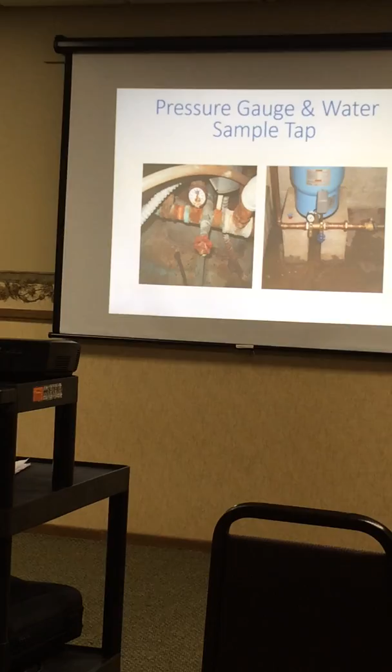If we find total coliform, we're doing an investigation. If we can't sample your well, now I know I'm not asking for a tap on the well, but usually there's a drain at the pressure tank. But in some rare instances, folks, you have no means of sampling the well. You have to sample at cabin 7 after it goes through all this plumbing. So you can't tell if the bacteria is in the well, that's the problem.

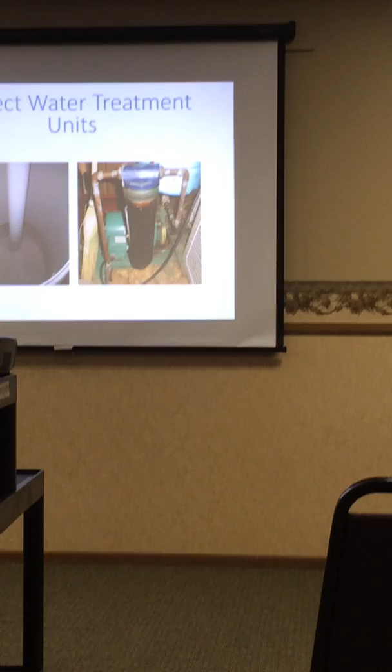So we should have a sample tap for each of your wells, and also, again, a pressure gauge that's functioning for each of your separate plumbing systems. And folks are being very good at not asking me questions, so jump right in there if you have one. I have a question back on that one.

So if you've got it down in the ground, you've got to pump it someplace to get to a spigot. I mean, you don't usually have a spigot right where it goes in the ground. That's correct, yeah. So you're still going to have to pump it through some underground pipe. Oh, yeah, yes. But proximity means everything.

Let's just say, for example, I've investigated many, not because I'm smart, not because I'm good, it's just because I've been around so damn long. I've investigated many TC contamination events through my career. And sometimes they're associated with water softeners.

So if you're investigating a total, I'm working with you, you want this to get over as soon as possible. You don't want to be dealing with this. You don't want me around. You just want to get on with business. I'm trying to help you. I am. Well, so I'm sampling.

If I've got to go to cabin 7 and it's all softened water, I can't tell you whether the softener's a problem or the well's a problem. I can just say something's a problem. If I can get a sample out of the well before the softener, nothing is for sure, but I can suggest that the problem's in the well, and maybe the softener too. Okay, good. Thank you for the question.

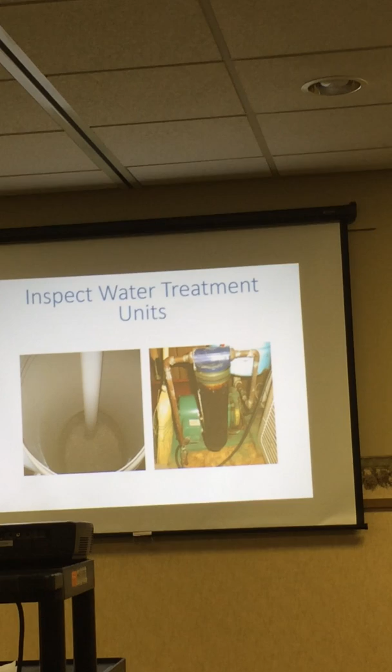So anyway, you have water treatment systems, and I would just say, in this case, that's a filthy brine tank in a water softener. You're asking for a bacteria problem if you allow that to happen. And really, you should be inspecting your water softener brine tank in the spring to make sure there's no dead mice in it and stuff. But I would suggest that it get cleaned out in the fall. That's the logical time to tidy it up.

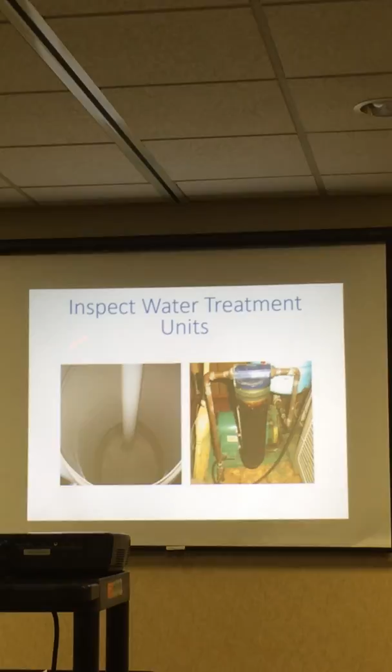Low on salt, scrub it out, add a little bleach water, clean it out, have it nice and clean to start the spring. That'd be my suggestion. But we're not requiring a shutdown procedure. The rule requires a startup procedure. Hence, don't start off the season with a filthy water softener is my point. And then cartridge filters, yeah, they're fine. They do something.

They only do something if they're maintained, and if they're not maintained, they typically make your water worse. And we've had bacteria problems associated with improperly maintained cartridge filters. So, did you have a question, sir?

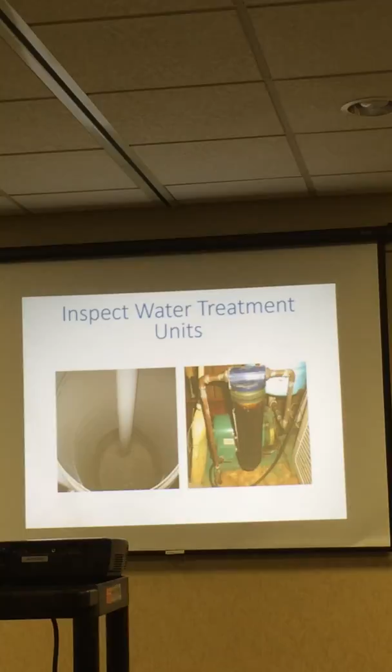Okay. And so, inspect the treatment system, one of your favorites, I'm sure. The government's always gonna bug you about this, and it's one of those defects that Chris talked about. So it's one of those things that we find now, and we say, you gotta fix this, and if you don't fix it, ultimately it's gonna put you on increased monitoring. You'll lose the ability to be on quarterly or annual monitoring.

So if you've been fighting, I am not gonna put an air gap on my water softener. Well, I'm sorry to say the government's got a bigger hammer now. So make sure that with your discharge lines from your water softeners, or if you have a backwashing media filter or carbon filter, anything that discharges to a waste stream, a treatment component, make sure it shoots through the air.

And what happens is, some years, this stays good, and then if you were my client, Chris was talking about the annual site visit, you know, we do our inspections every 3 years, but now we have to do this little mini inspection to keep the EPA happy, to keep you on annual monitoring. We look for sanitary defects. If I knew you had this, I wouldn't say, Eldon, I need to go look at your water softener and make sure you got an air gap there, because it was there last year, and it's not gonna change.

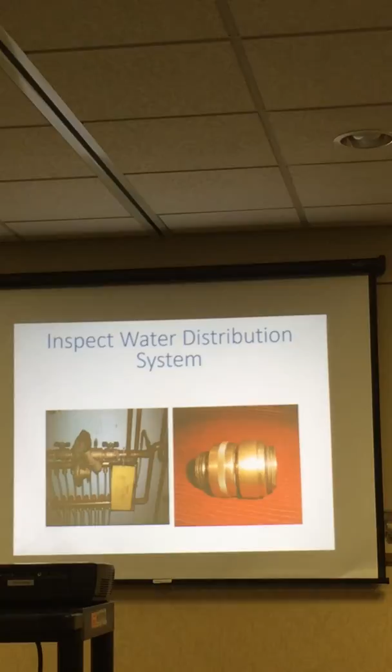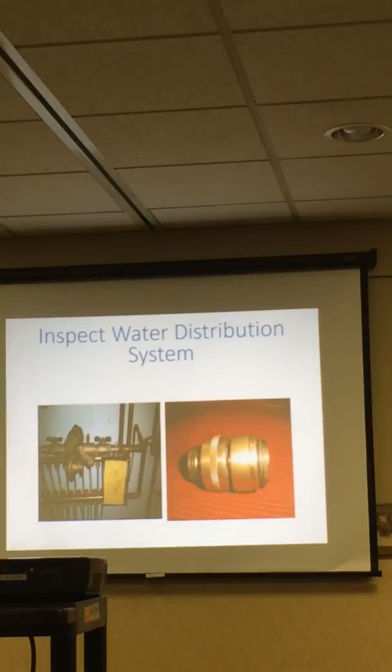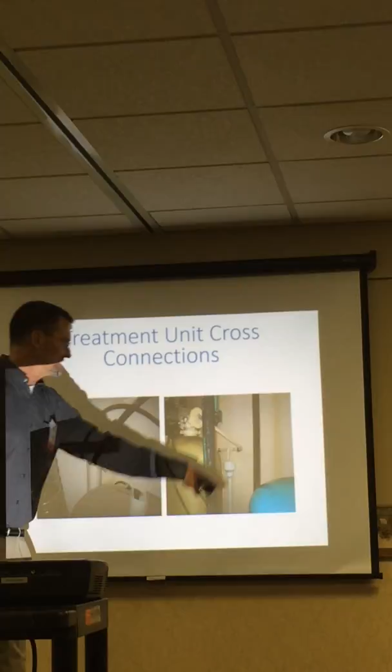Do they have anything for that air gap that you could have for an outside system? Discharge it to the ground surface? I don't want somebody throwing something in that other little piece of pipe. Should I go back one? With the big, the 4-inch going. Yep. Okay, so you're concerned about somebody dropping stuff down in there? The other one, it's open to the public, yes. So if that were outside, you're saying? It's open to people walking by.

Are you worried about liquid or solids? Anything in there. Well, if it were mine, you could put chicken wire over it, and you're not defeating the plumbing code, but someone could still pour their gin and tonic down there, if that's what you're trying to avoid. But no one could throw a cigarette butt. Yeah, there you go. That's a great question. I don't know if I have a great answer for you. Well, probably not. I made one.